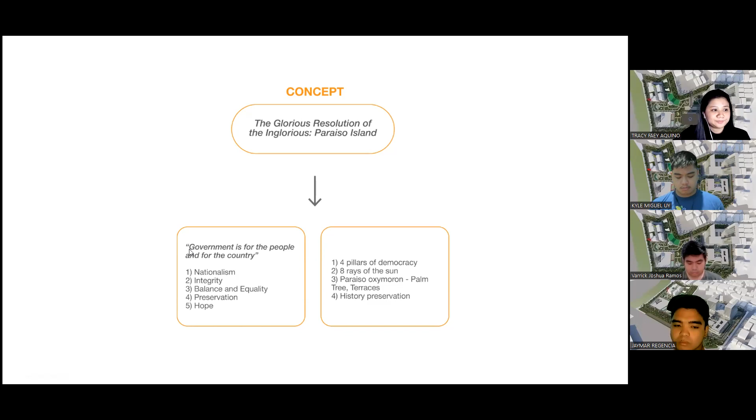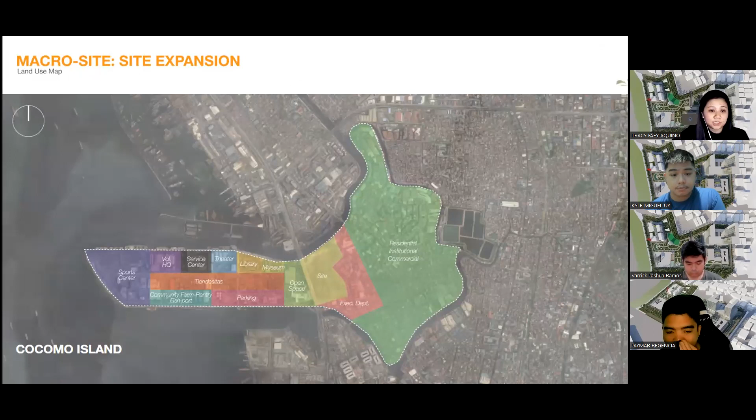So for our site, it is in Smokey Mountain in Tondo, Manila, having approximately 113,000 square meters. This project has also been formulated considering its immediate vicinity, or the entire Cocomo Island, for future development.

The site analysis is in this part. We will discuss the following: user activity, sensory experience, transport analysis, vegetation, and water analysis.

So this is the user and activity analysis within a 500-meter radius. The social class present around the site is within low to middle income class. Around the site, there are residential, leisure, commercial, and institutional activities such as elementary schools, sari-sari stores, and other local businesses.

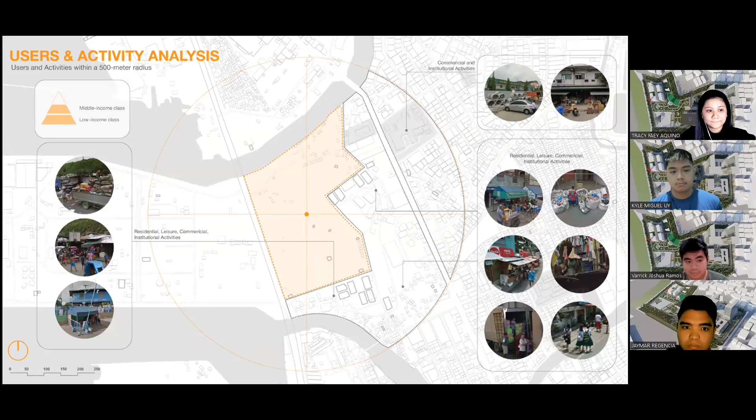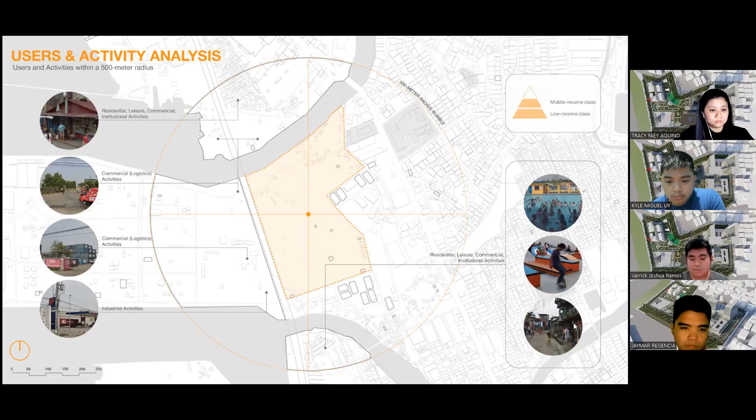To continue, around the site, there are industrial businesses such as logistic activities for shipping and more. There are also leisure areas like swimming pools and parks. With this, there are plenty of people around the site, and we consider this through having public parks accessible to them in the complex, which are the historical sanctuary and the terraces.

Primarily, its location is beside a busy street and a medium intensity mixed use zone. We wanted to buffer the noise while giving a vista or a good view of the vicinity. Second is history, where we want to defeat the inglorious image of the site to one that is glorious. Lastly, we want to design a building for the people.

We will not be going into detail about the said parts. Still, it was essential for the group to analyze the site in the context of sensory experience because it gave us a grasp on how we can design our complex.

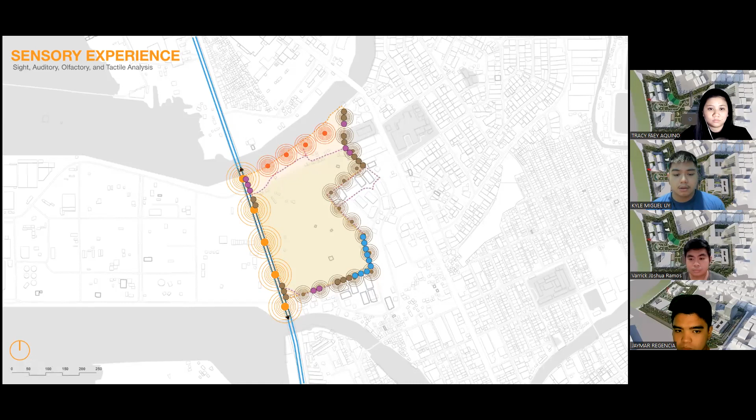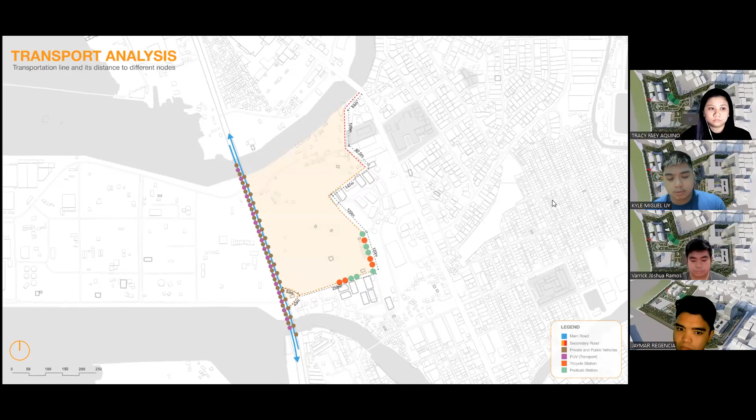Aside from the sensory experience discussed earlier, we also tried to analyze the transportation around the site. Through the analysis, we developed routes for the jeepneys and pedicabs.

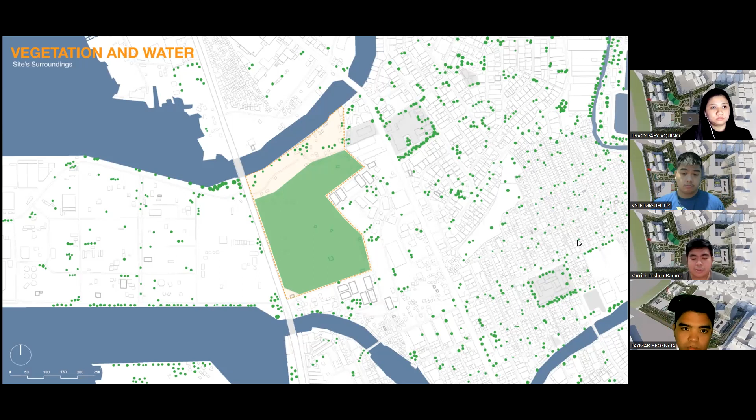So this is the vegetation and water analysis of the existing site. Since there is little vegetation in and around the site, we developed the site based on this issue through providing enough amount of greeneries. And since the site is surrounded by water, we took advantage of this by making the water part of the vistas of this project.

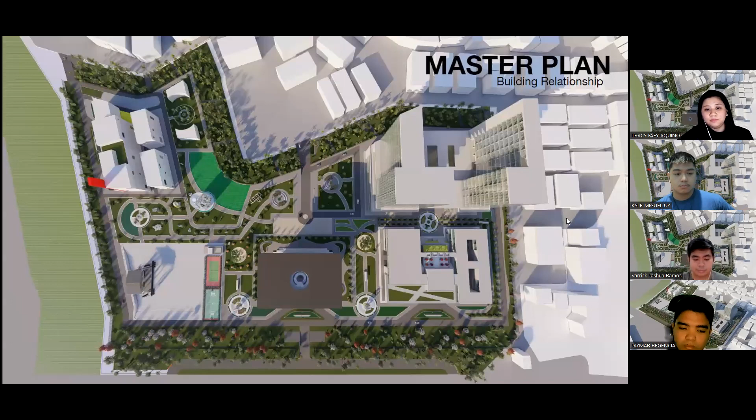Moving on to our master plan, here's a 3D plan of the general master plan of our complex. Generally, the entire complex is surrounded by heavy greeneries, parks, and water features, which binds the entirety of the project. This goes back to our manifesto of transforming Smokey Mountain into a paraiso.

So the executive building has been isolated on the upper left of the site to ensure security and privacy, while the Supreme Court has been placed right in the middle to break the connotation of the Supreme Court being aloof. We also wanted to establish an impression of being open and transparent.

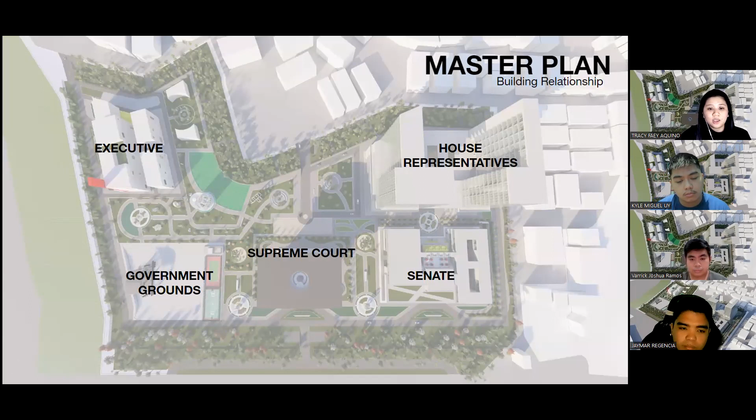And then lastly, the House of Representatives and the Senate have been placed near each other, as they both function as the legislative branch, which works on laws and provisions.

So here's an isometric view of the master plan.

On the design elements of each typology, our group incorporated Solihiya pattern glass panels on our structures to reflect the manifesto of symbolizing the project as a ray of light for the marginalized, as Solihiya patterns are sunburst patterns. The structures have also been heavy on glass to mirror transparency of the government.

We also incorporated palm terraces and a history sanctuary, which are both open to the public. This aims to bring the Filipinos closer to the government and establish confidence in it, and at the same time fight issues against disinformation and misinformation.

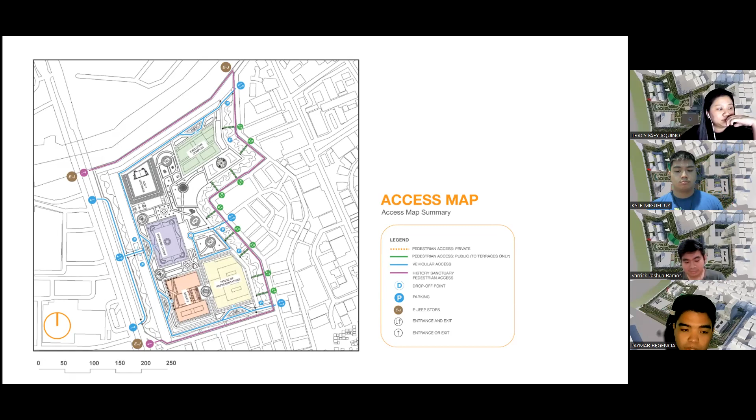Here is the access map of the site. We wanted to make the site as permeable and porous as possible for the users, which is why we allocated access not only for pedestrians but also for vehicles inside the site. However, we wanted to make it human-centric, which is why we placed the road only at the perimeter of the site.

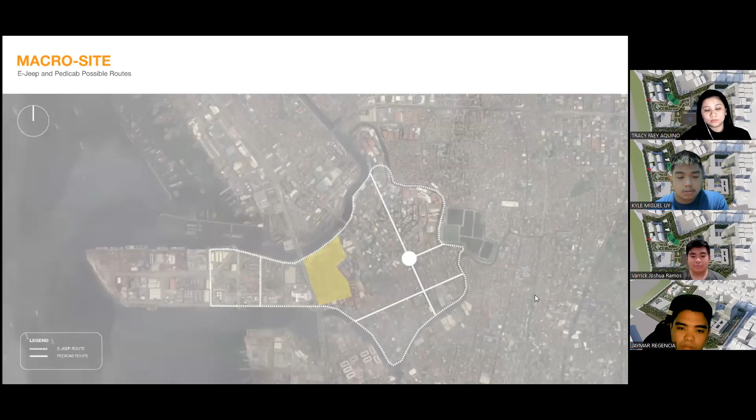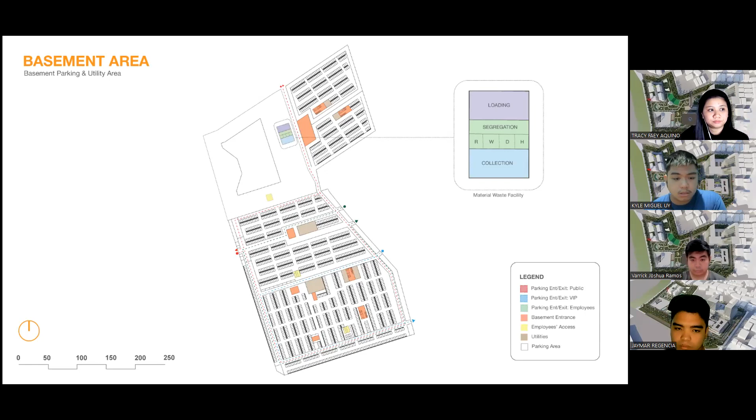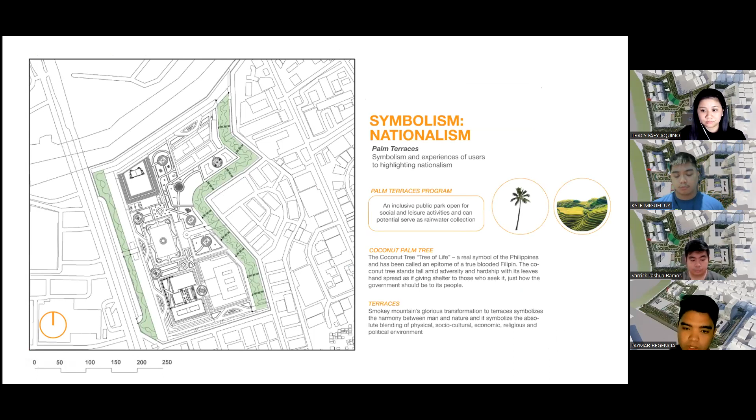Here is the palm terraces located in front and at the back of the site. It is a public park open for social and leisure activities, completely open for anyone, and it brings the people closer to the government.

Next we have the History Sanctuary, a public park aiming to promote nationalism and provide an opportunity to raise awareness among the Filipino people about its rich history and culture.

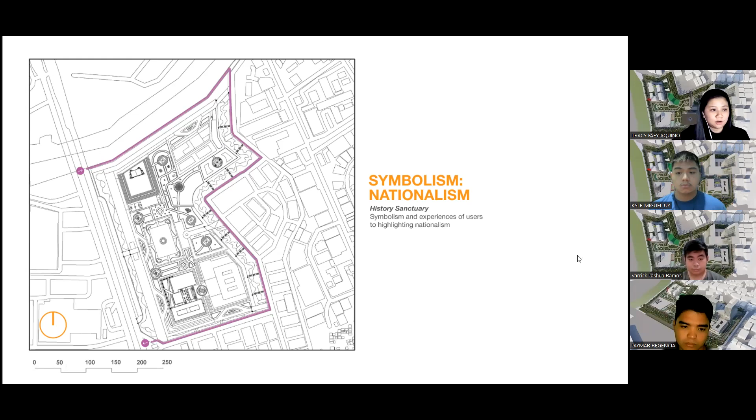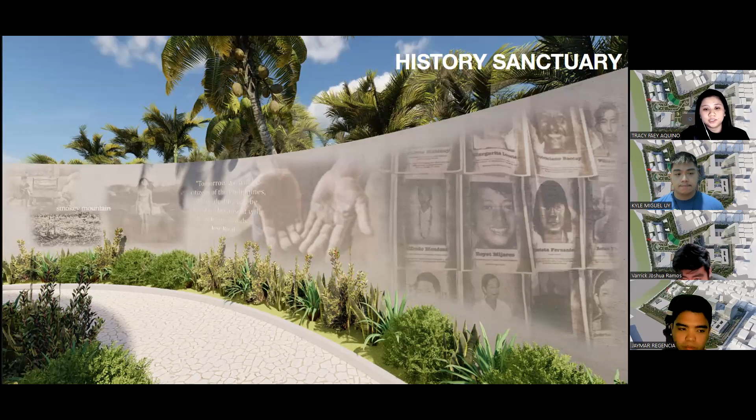So this is a perspective. This sanctuary will hold a pathway of greeneries, and its wall will be filled with information and artifacts from our history and culture. This aims to remember Philippine culture and history, and also Smokey Mountain stories, to reminisce the glorious end of the inglorious.

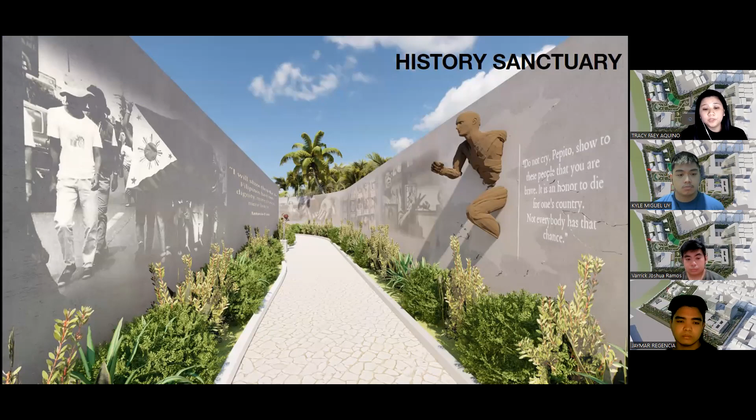Here's another perspective of the sanctuary, again displaying history and culture for the Filipino people's benefit and knowledge.

Now for the processionals and vistas. These are eight pocket parks that will provide internal vistas around the site, connected to pathways that give off a comfortable impression and user experience when walking from one point to another, creating these processionals.

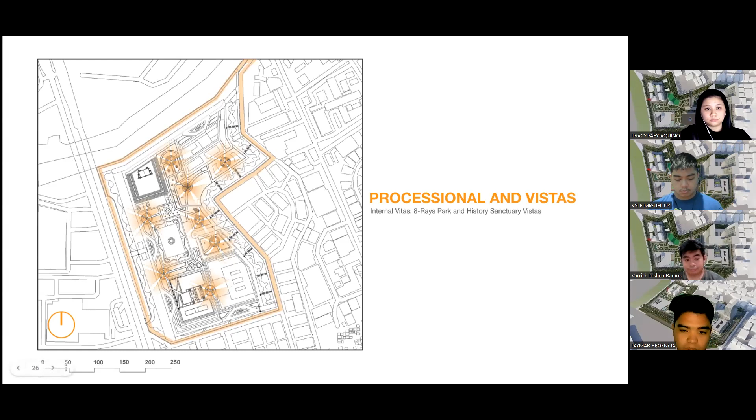Each park will provide different vistas to each of the government buildings, depending on which pocket park you are standing in. Through these processionals and vistas, it can create legibility for the users and visitors, as well as provide a clearer view of the site.

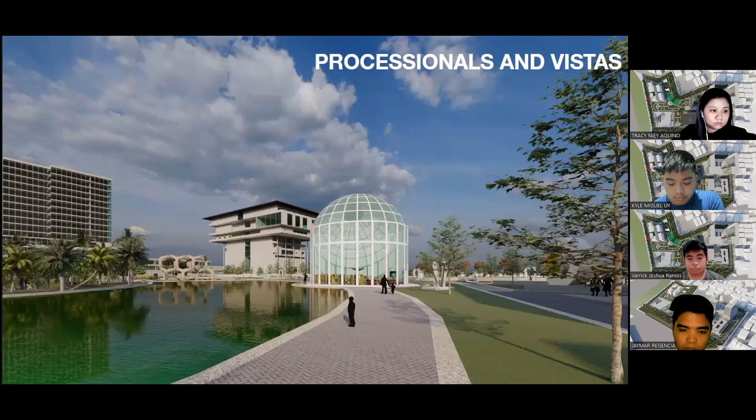Here's another perspective of one pocket park, and here's another one.

Moving on to the individual typologies, starting off with the executive complex.

My personal typological manifesto for this executive complex is becoming one with the people. The executive department, being the highest branch in the government, plays a big role in the lives of the people. That is why I decided to apply and incorporate a design concept inspired by the lives of the unprivileged. This concept will be further elaborated in the individual submission, but for now let's move on to the site development plan of the complex.

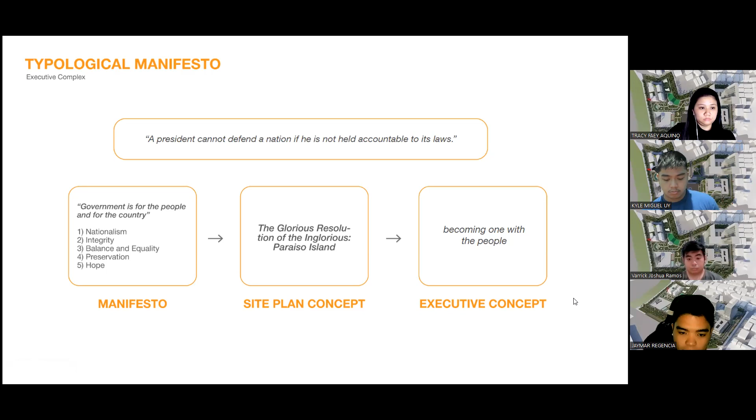We purposely isolated the executive department from the other branches because we prioritize the security and privacy of the executive people and admins, such as the president and his or her family.

We also thought that the executive complex can work independently compared to the other branches, hence the reason why we isolated it, as well as the basement parking discussed earlier.

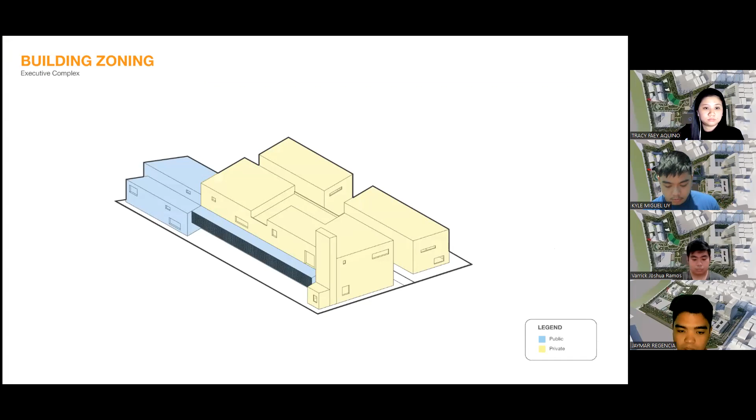For the building zoning, the public zone is the blue one and the private zone is the yellow one.

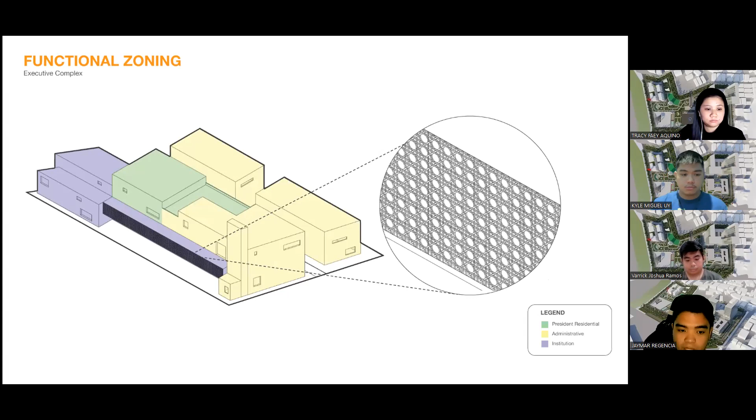This is the functional zoning. The purple one is the presidential museum, which is the public zone. The green one is the presidential area, where the private quarters of the president and his family are located, separating work from home. The yellow one is the administrative zone, where the administrative offices are located.

Here's a perspective of the presidential buildings. The openings in the building were also inspired by the artistic concept De Stijl, which I also used in the form finding. Then I added this red accent to the facade to add a little bit of sharpness.

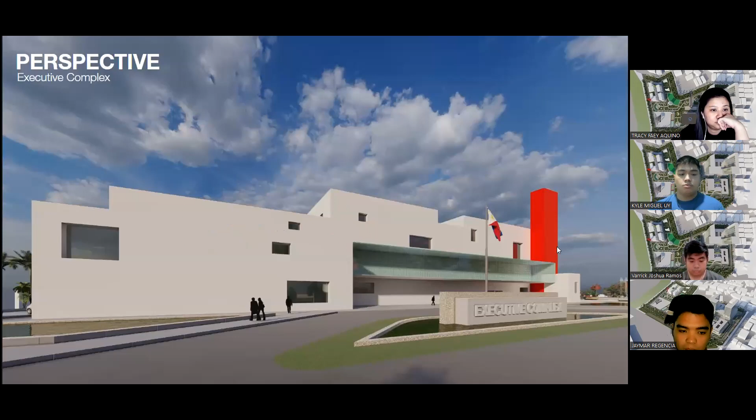Here's another perspective of the building.

The next individual typology we are going to discuss is the Senate. As mentioned, our group's manifesto of the government is for the people and the country, mirroring our site plan concept of the glorious resolution of the Inglorious, or the Paraiso Island.

This now resonates with the Senate building concept of having reachable guidance for all Filipinos. The Senate and the House of Representatives are the ones who curate regulations that ensure the preservation of freedom and moral agency, and the Senate building is a structure that will be the guide for Filipinos.

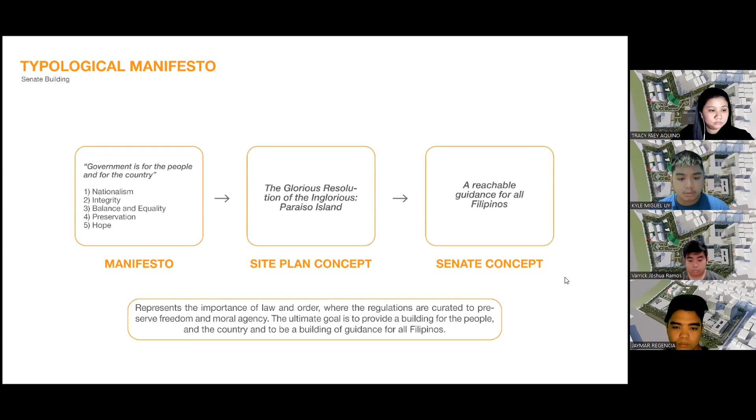The position of the Senate will be on the southwest of the elevated complex. It will be beside the House of Representatives on its east, and the structure will be close to two of the eight pocket parks in the complex.

The structure overlooks the R10 road and the neighborhood around the vicinity, and since the building can see the current condition of its surroundings, it can somehow ignite the leaders to serve the people to the best of their capabilities.

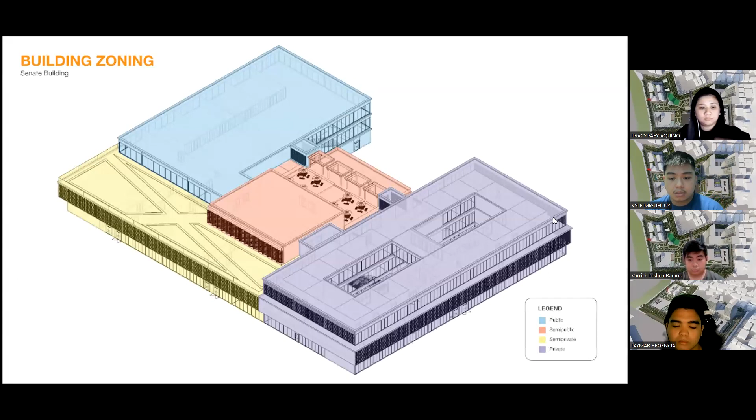Moving on to the building zoning, the Senate will have four spaces: public, semi-public, semi-private, and private. These are color coded as blue, orange, yellow, and purple, respectively.

Next is the building programs. Going back, for the building programs there are four parts. The blue areas are open to the public, and that is the library building.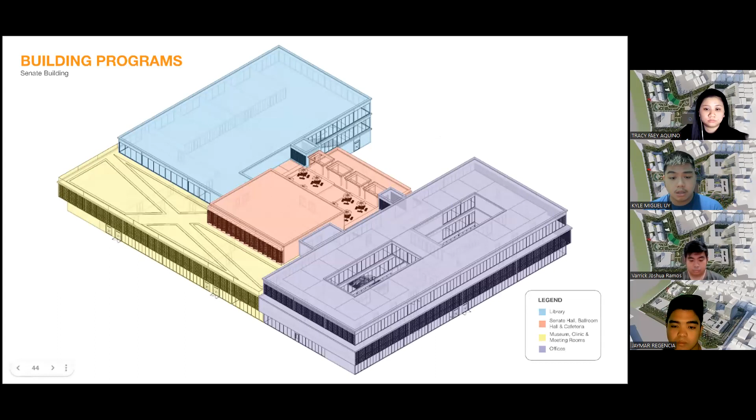Next is the semi-public, or the orange, which houses the cafeteria, ballroom, plenary, and Senate hall. Next is the yellow, which is semi-private and includes a museum, a clinic, meeting rooms, two lounges, dignitaries, and committee rooms. Lastly, the purple is the private building that houses staff amenities, secretariat, and senator offices.

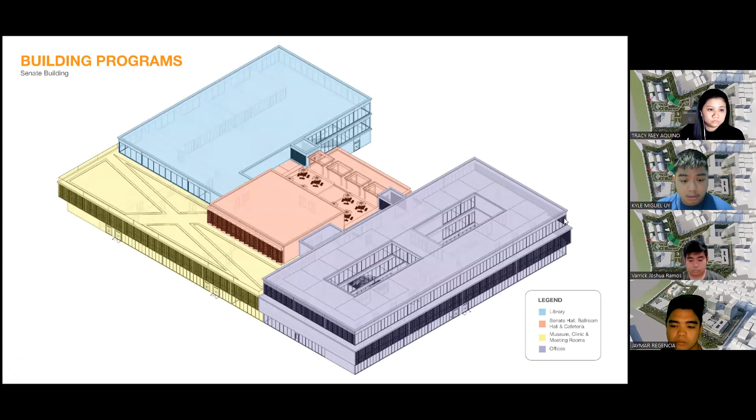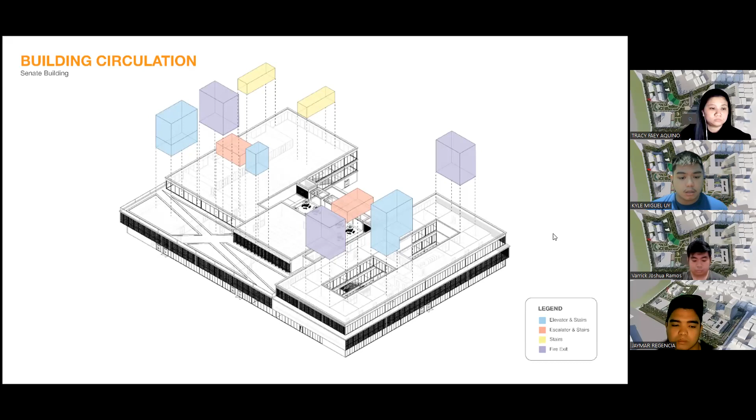Now for the building circulation, the whole building will utilize elevators, escalators, stairs, and fire exits to access one floor to another. For the building utilities, the utilities will be located beside the elevators as shown in the slide, and the size per utility room is around two square meters.

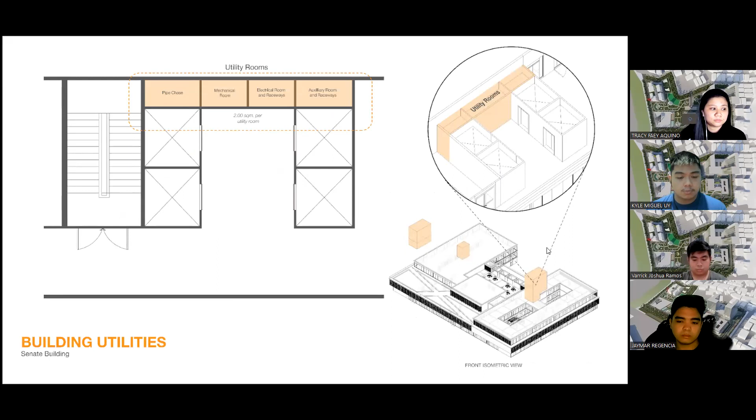Moving on to the perspective views, the Senate building is not high because I want it to be reachable for Filipinos, meaning they can reach or are close to those guiding them.

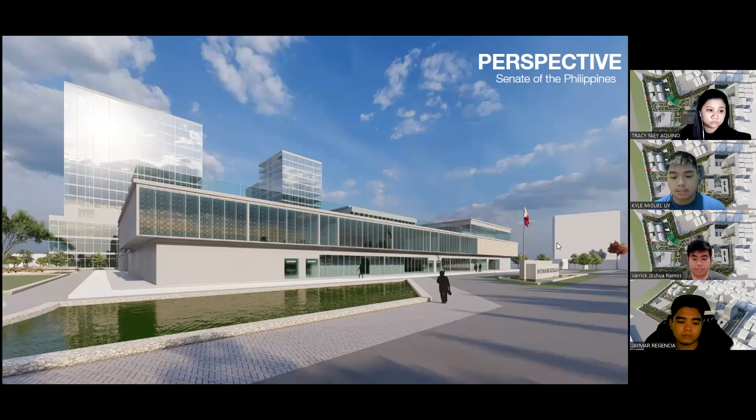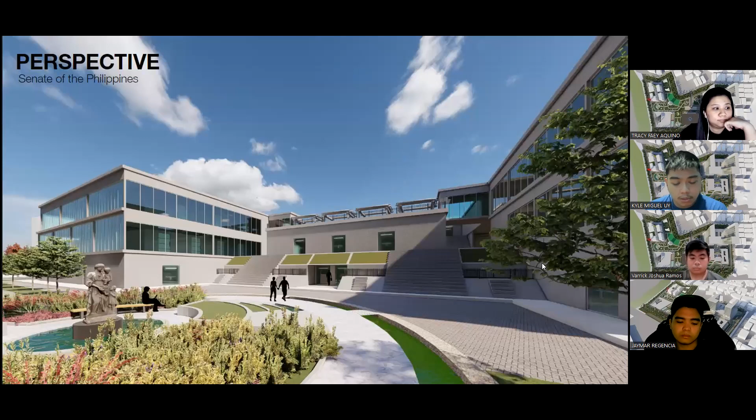This is my last perspective, the rear view, where you can see a set of stairways going to the top of the building, where you can reach the Senate Hall. This represents the symbolism and the Senate building concept of having reachable guidance for all.

So next we'll be talking about the House of Representatives. For the manifesto, it is the embodiment that a better future is possible no matter the past. A structure where all Filipino can look up to, following the democratic values, openness, transparency, and participation.

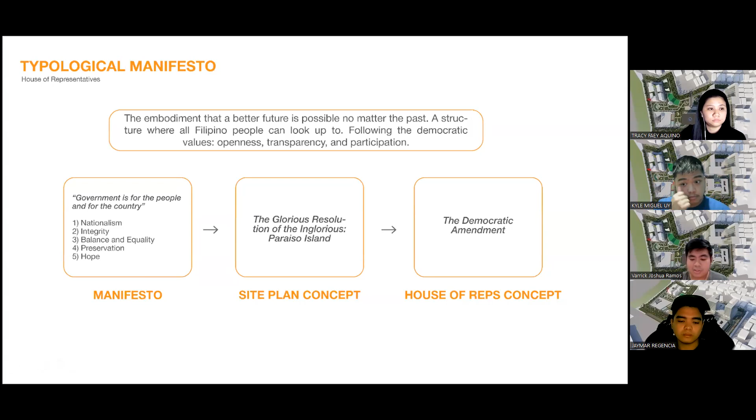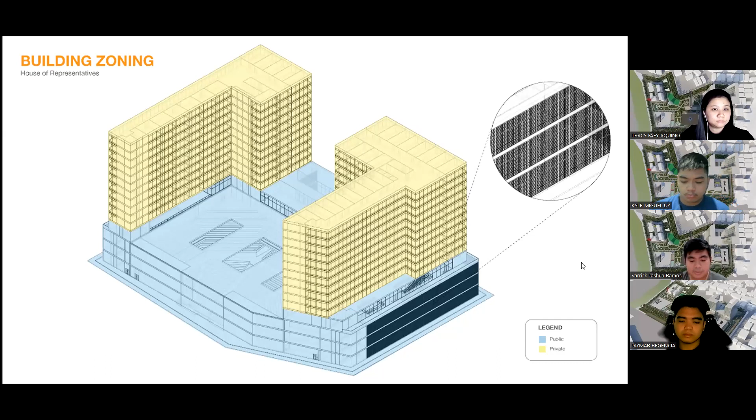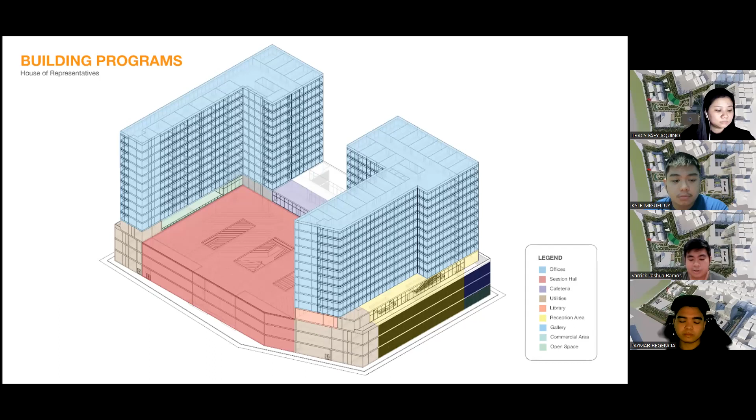For the programs, again, the blue is for the offices, while the color red represents the session hall. The other colors represent the amenities, utilities, and services for the public, like an outdoor ancillary, cafeteria, library, and more.

For the building circulation, you can see that the elevators and stairs are easily accessible as part of the concept. The hallways are wide and straightforward.

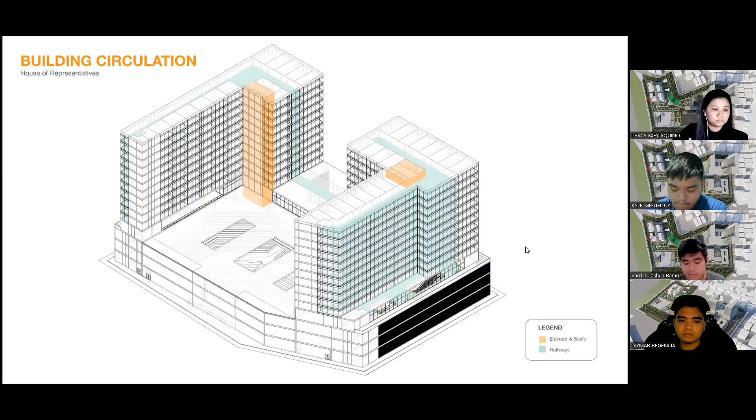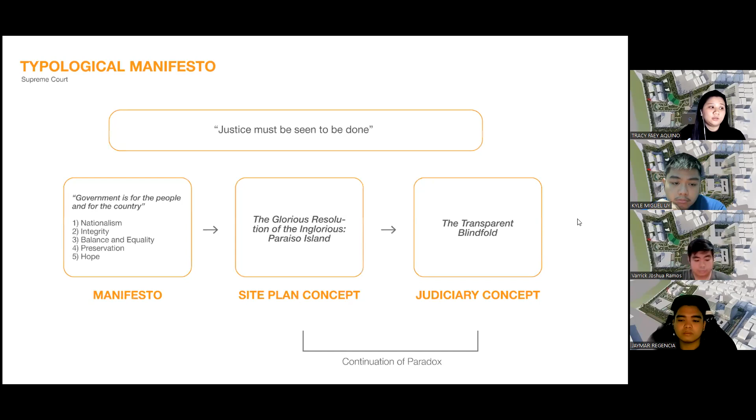Moving on to the Supreme Court. For the typological manifesto, justice should be seen to be done to protect proceedings against arbitrary and partial decisions. Having openness and transparency within the Supreme Court and the entire justice system is a vital point in serving the Filipino people, going back to the manifesto that the government is for the people and for the country. As mentioned, the Supreme Court has been placed right in the middle of the site for it to be highly visible, to break the connotation of the Supreme Court being aloof.

It intends to establish an impression of being open and transparent. The design elements such as Solihiya pattern glass panels, a grand ramp system, and the sun-frosted skylight, along with its overall form, have been the key design features that translated the typological manifesto. These will be elaborated on the individual slide presentation.

Additionally, the structure blends with the site through heavy greeneries with pop-up cafe, leisure spaces, art installations, water features, and seating spaces. For the general circulation, I have incorporated a grand ramp system for smoother flow of the users. There would also be 2 fire exit stairs, 2 elevators, and 1 service elevator.

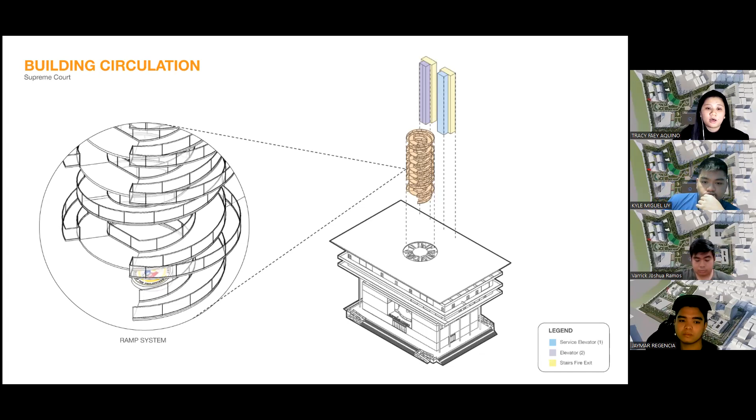Additionally, the circulation of the entire building has been developed based on public access, controlled access, and secured access, basically for security purposes. This will be shown on the individual slide.

Next, here we have the building zoning, with orange being private and blue for semi-private. The blue basically holds the discourse division and orange is for adjudication and administrative. The basement is also for the secured access for VIPs.

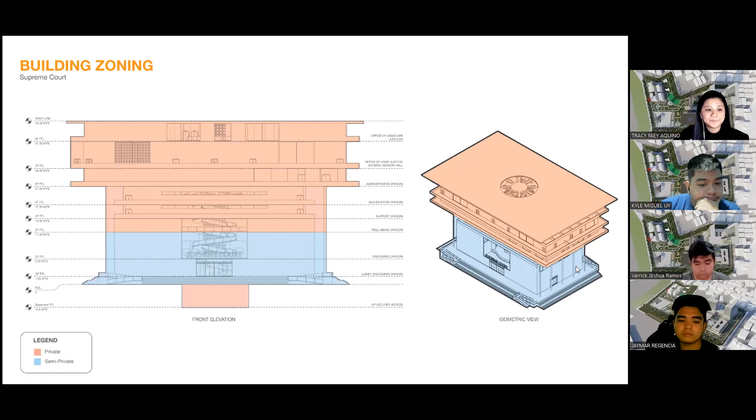Next, here we have the general building utilities. A typical utility room will be provided on each level of the structure, containing pipe chase, mechanical room, electrical, and auxiliary rooms. These utility rooms are located at the core of the building at the rear part. At the basement, the main utility room is located, containing the genset room, transformer room, garbage, and pump room.

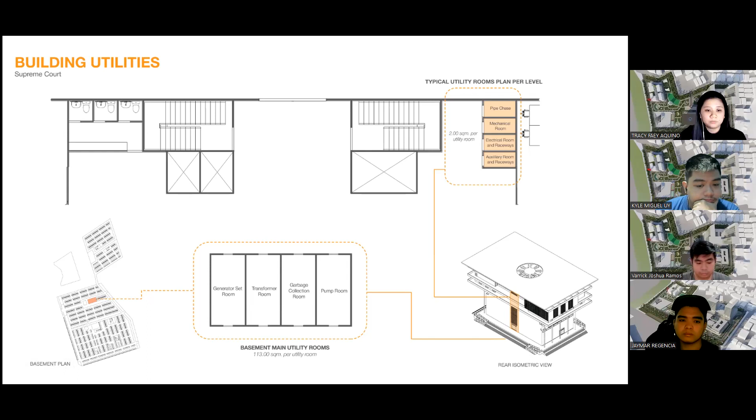That ends our presentation. This is the Paraiso project, the glorious resolution of the inglorious.